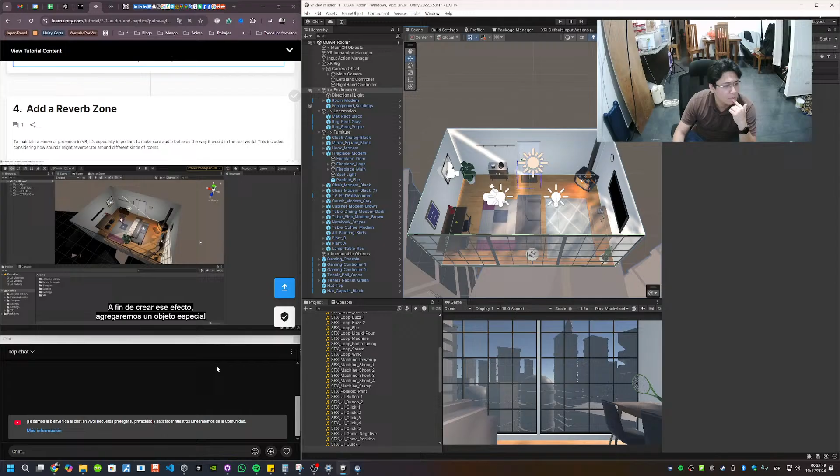So if you watch a recording of some music, they'll be in a really padded room where there's not a lot of sound bouncing around, which is why they have all the padded walls and stuff. Versus something like an opera house where the chamber is really large and really open, so it allows for very spacey, open sound happening. So the way we're gonna do that is by adding in a special object called a reverb zone to create that effect.

In order to do that, I'm gonna select the room object that I have. So it's in my static objects here, room modern. Now inside of my room object, I'm just going to right click on it, go down to the audio option, and create an audio reverb zone as a child.

Now, if I zoom out, you can actually see the effect of this reverb zone. So it's actually pretty large. There are two different spheres here. If you can't actually see this reverb zone, you might have your gizmos disabled.

So if you go to the top of the scene view here, you can just click on the word gizmos. It'll disable all of your different gizmos. If you click it again, you should see all of your different gizmos.

Now, the two spheres that we see here are the minimum and maximum distance of this reverb zone effect. So anything within the minimum distance is always going to have the full effect of any audio reverberation that you set. Anything between these two spheres, the effect will slowly start transitioning out until you get outside of the sphere, where there will be no reverb, essentially.

So that's kind of helpful if you're going through two different environments or zones. You want to use the minimum and maximum distance to create that sound shift. For now, the only thing we need to do is make sure that our minimum distance is the size of our room here, since we're not even venturing outside of it anyways.

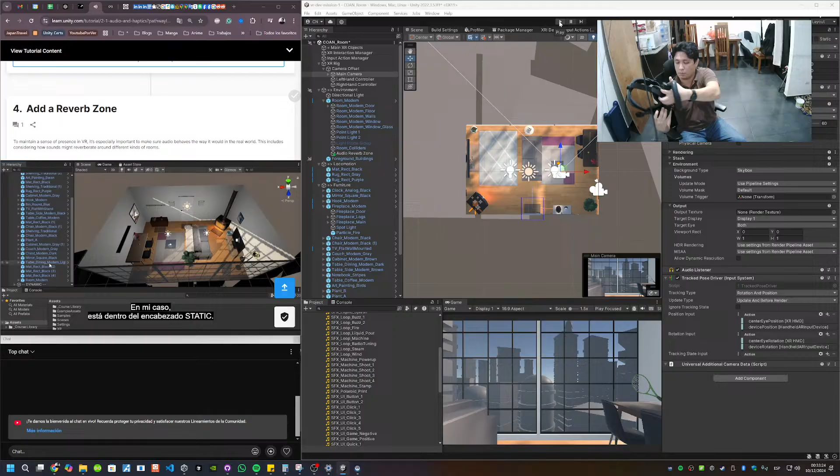So what you're going to do is in your hierarchy, go to where your room object is stored. In my case, I put it in that static header. With room modern selected, right click on it and create an audio reverb zone. Once you do that, it'll add the audio reverb zone as a child of that room object.

So you can select that, and then with it selected, make sure your gizmos are turned on. If not, just click the gizmos button at the top, and you should see these two blue spheres here. All you're gonna do is change the minimum distance down to be the size of the room here.

While our current 3D audio works perfectly fine on our fireplace here, we can install additional libraries from our headset providers to make that audio spatialization even better. Now, this is something particularly important if you have a lot of audio in your scene that you want to affect, but it's something that's entirely optional to add. So let's take a look at the audio library available through the Oculus Quest.

Now you can see here that Oculus provides its own spatializer library just for Unity. And I can go ahead and download this from the website if I wanted to. Essentially what would happen is I get a folder that I unzip that has a Unity package for Oculus audio spatialization. Now this audio spatializer plugin is really helpful if you want to level up your audio even more. Essentially inside of the spatializer plugin are a bunch of audio libraries to help make your audio experience feel even more real inside of VR.

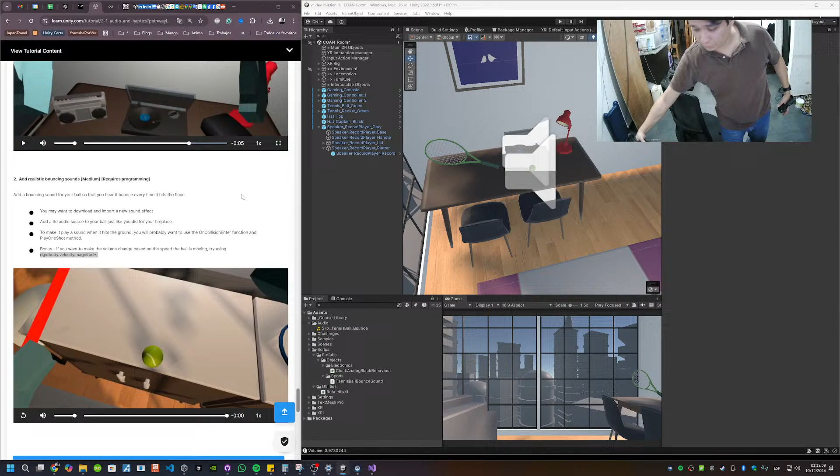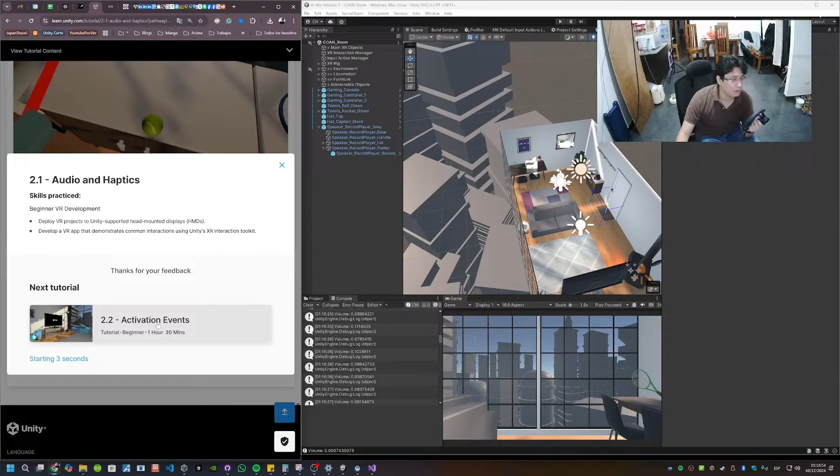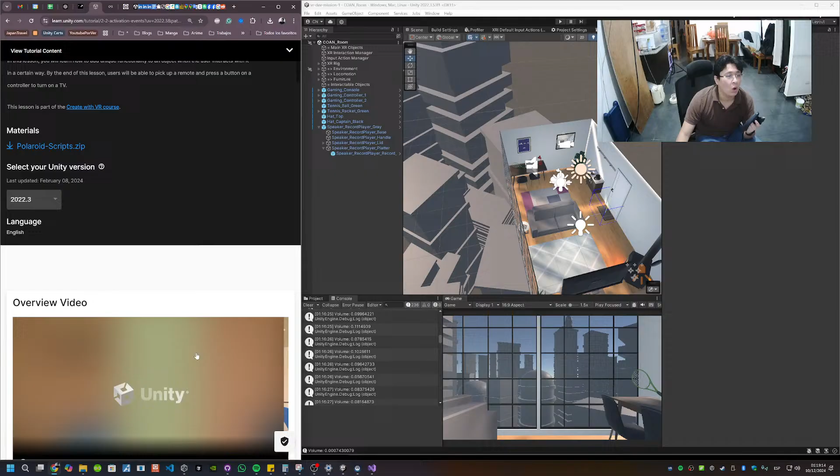Activation events. Users will be able to pick up a remote, press a button on a controller to turn on the TV. Oh ok, eso es nuevo. Pero eso lo dejamos para mañana.